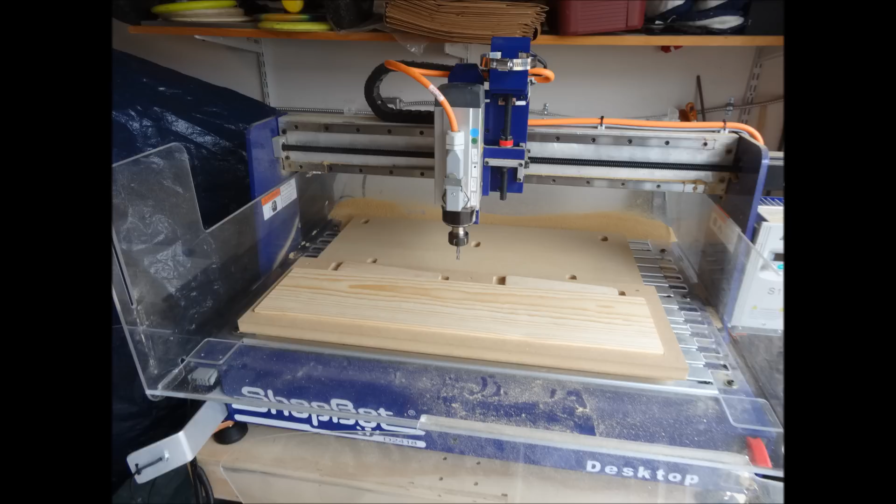Today we're going to do an inlay using a ShopBot desktop and the VCarve software with the inlay feature. We're going to be using Vectric's VCarve Pro or Aspire software for this demonstration.

What we're going to be looking at here in this first example is what would happen if you don't compensate for the tool radius. So we have our normal job set up, and we go over here to create our toolpaths. Cutting an inlay has a male and a female cut. Whether they're through or pocketed, it's still going to be the same two types of cuts.

A problem that people run into is they use the pocket and profile toolpaths up here, and that does lead into some problems. So I've created a profile and a pocket toolpath, but doing that with an inlay, you're going to come into some issues that won't allow these to mate.

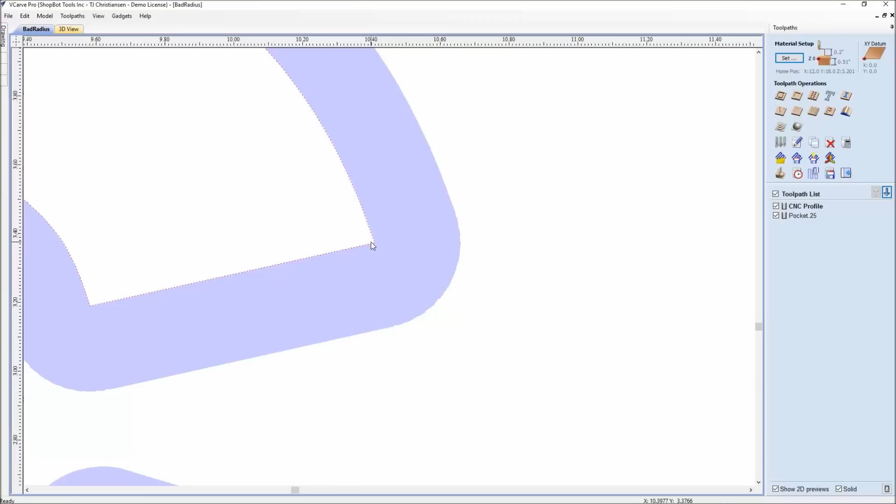So first of all, with a typical profile toolpath, it is selected in this example to cut on the outside, and that would leave a square corner. This purple demo can be turned on and off right here to make your toolpaths solid. And as we see, this is a solid purple, a straight corner inside the purple.

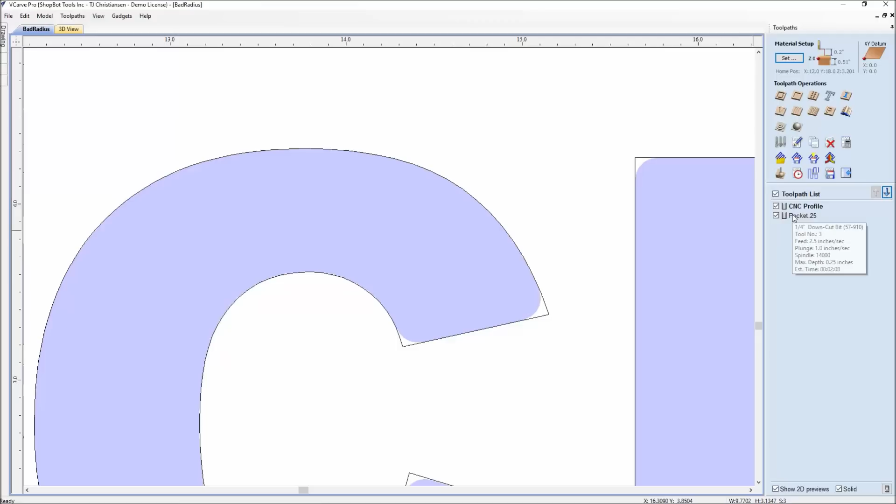If we look over here, because it is a 1/4 inch cutter that we're using, even though it is a 1/4 inch down cut on both tools, you can't cut a square corner with a round bit. So that's where Vectric has added this feature here called the inlay toolpath. That's going to allow the software to do the moving of the corners and mating the male and the female, or the pocket and the insert.

But let's show you what this would look like out on the machine. We can see it here in 2D that it's not going to be able to get the bit all the way down into the corner of the N, where the pocket will be perfect. We have our rounded corners on our C's, and we have our square corners. So let's look at what would happen out on the ShopBot itself.

So here we are on our ShopBot desktop. We have a 1/4 inch down cut in, and we're just using a jig here because it's easy to switch out the blanks for this example, but any other format would have worked for a hold down. And here it is cutting the C. We're in a piece of pine.

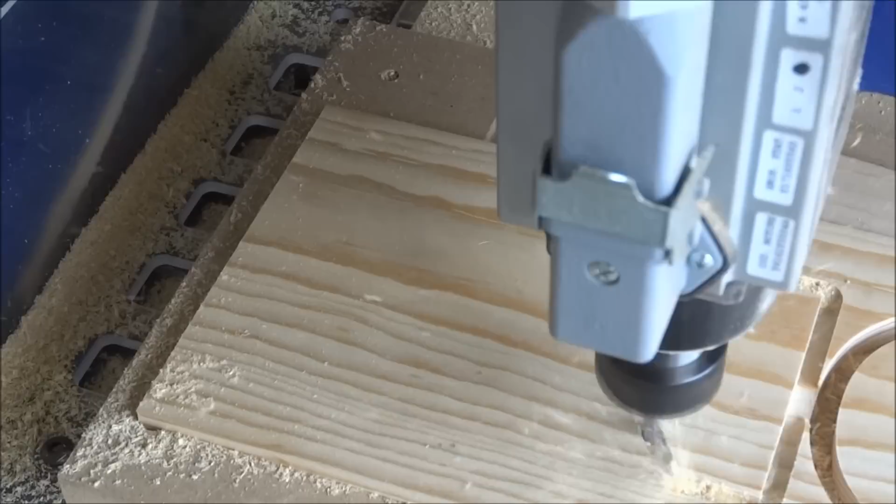And again, this is showing you what would happen if you use just the pocket and profile toolpath, where it does not compensate for tool radius. So we have our exterior square corners on our pockets. And also notice how close these parts are to each other. We are not leaving much of a space in between. And then when we get down to make that final cut, even with tabs, you have the leftover pieces in between the C.

So here we are now doing the pocket, same bit, same tool radius, and it's moving back and forth and carving this out. But like we just saw in the Vectric 2D preview, we're going to have square corners and round corners. So even though it's the same radius of the bit, the parts aren't going to be able to mate together.

We can see right here from looking at the profile versus the pocket. You can also see the scrap here. Look how close these parts are. That's something that could come loose. Notice how the C moved a little bit. Though I broke the tabs out, the inside of that C came with it.

So doing it this way is not going to allow the parts to mate together. One, the tolerance is so tight on the cut, and two, you have a square corner and a round corner. By looking here, you can see it's just not going to physically fit in. So this last example showed a few problems that happen when we don't compensate for the tool radius.

So let's look at how we would go about doing this correctly. First of all, I'm going to do this out of two different species of wood, so it'll look nice.

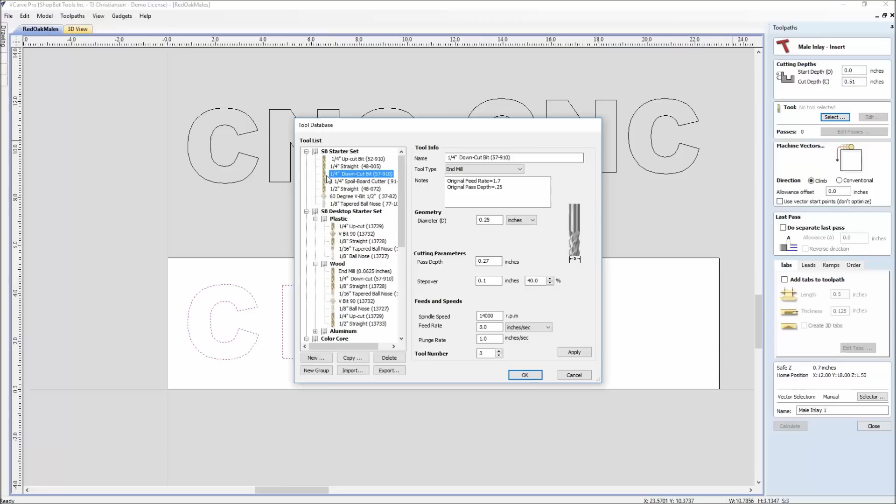So there's my Z thickness of 0.5. I like to go a little bit deeper into the spoil board to make sure I get a nice through cut. This is the key to using the inlay toolpath function: the auto inlay will only work if you select the same size diameter for both the male and the female. So I'm going to use a 1/4 inch down cut just so I don't blow out any grain on this one. I'm going to leave it as a climb cut.

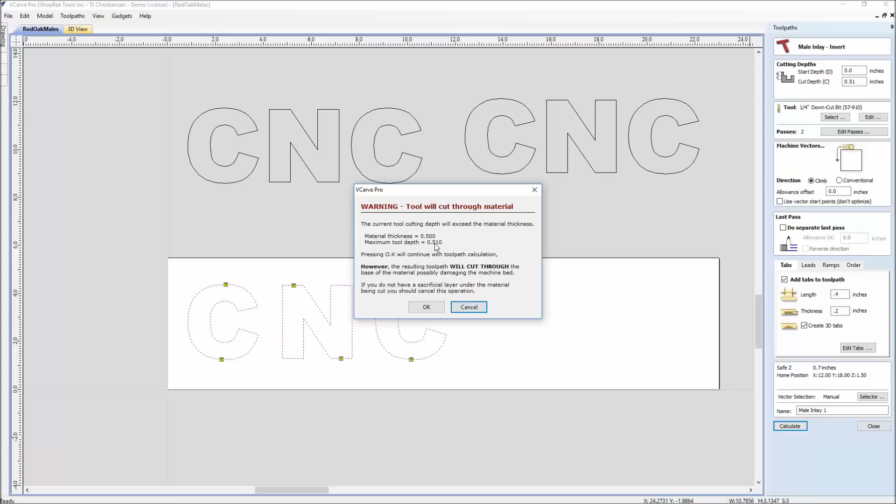Since these are going to become free-flowing letters, I'd like to add tabs to those. And we're going to give it a decent tab so that it's not going to have a chance of coming loose. And these as 3D tabs. And this one even has a name for it, male inlay 1, so we know that it's the male cut. And when we hit calculate, it's going to first say, hey, your material is 0.5, but you did say 0.51. Are you okay with that? So check both the decimal and the numbers. You don't want to see a 5.1 in there.

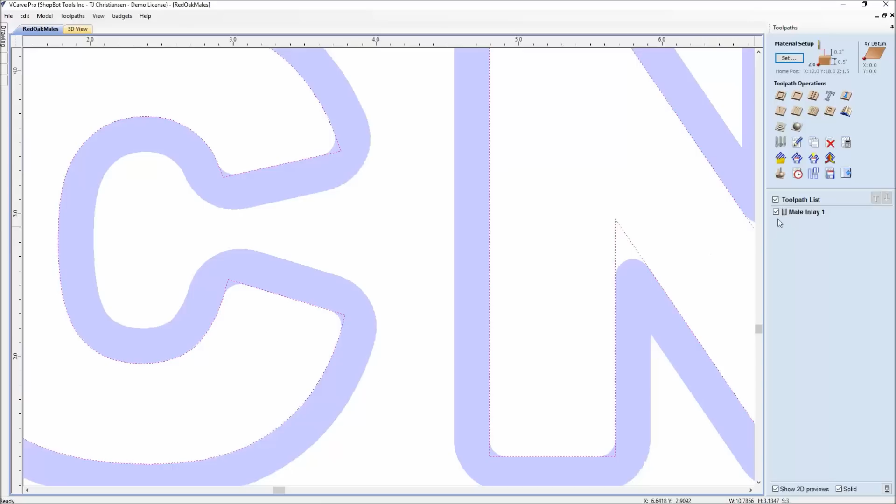And hit OK. And then here we are in preview, where we can preview the visible toolpaths. Obviously in the 3D, we now see rounded corners, even though our font had a straight corner. And then back here in the 2D view, I can turn on the solid, turn on the toolpath. And using this inlay toolpath function, it was able to break that corner with the 1/4 inch radius bit. So it also broke the sharp corners, and it knows how far it can get into these corners on the inside. So this is where we will go next out on the ShopBot and cut the male portion of this.

So here is the first piece that we're cutting out of red oak, and this is where the jig comes in handy, because you're using several different species of wood, and it's just easy on and off with the material versus running the screws in the corner and lining it back up. So that's just an option that you can have. Notice there's the tabs that go in there to keep the C from coming loose.

But now, as we saw in the toolpath of the Vectric software, using the inlay toolpath function, it went ahead and broke those sharp corners up, and it knows to compensate the tool radius for a 1/4 inch bit. So as long as you're choosing the 1/4 inch bit for both the male and the female portion, the software is going to put the right size radius around the inside and outside of your letters or whatever it is that you're inlaying. So breaking the tabs out, you might have to sand up the tabs a little bit. If you want to stay away from tabs, you could look at different types of hold down to keep that in there for a really precise inlay.

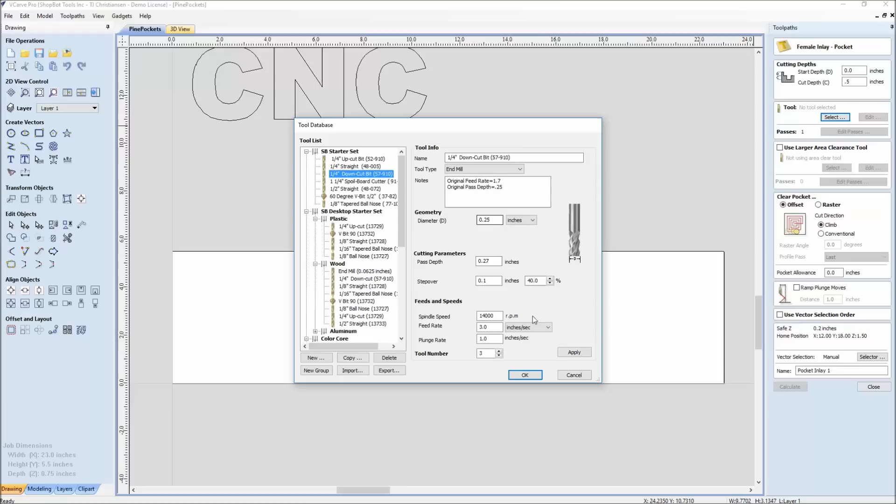So the key to this one, 1/4 inch down cut. That's what I used in the last one, a 1/4 inch. Make sure you have the same diameter. Select this, and depending on the wood and the materials, you'll come in and pick your type of cut. And this one here, I'm going to go ahead and hit calculate.

Again, it does go into preview with the 3D. Preview what it looks like. You can switch back to 2D. You can see what you're doing with the solid view by turning on the solid preview. So a couple things that we're going to look for here: we see that there's the other part of our pocket that's going to stay to match the male.

But something that you can set in either profile, pocket, or inlay, male or female, and that's what we're going to look at here, is the pocket allowance. So right now we have a 0.0 allowance, and when we hit calculate for this, it's just cutting the female version that would be mating with the male.

And this is just a trick that I like to do. We cut out the red oak one first that had the individual pieces. Now those are sanded, those are off the machine, and they're free pieces. I like to go next and cut the female portion, the pocket. And then when that's cut, it's still attached to the table.

I can take the previous cut of these red oak individual CNC pieces and try to fit them into the newly cut pockets. And if they don't fit, that's where you can go back in here and add what you would call a pocket allowance. I just found personally that it's easier to do it on the pocket or female inlay, because you have these physical male parts already out that you can fit in.

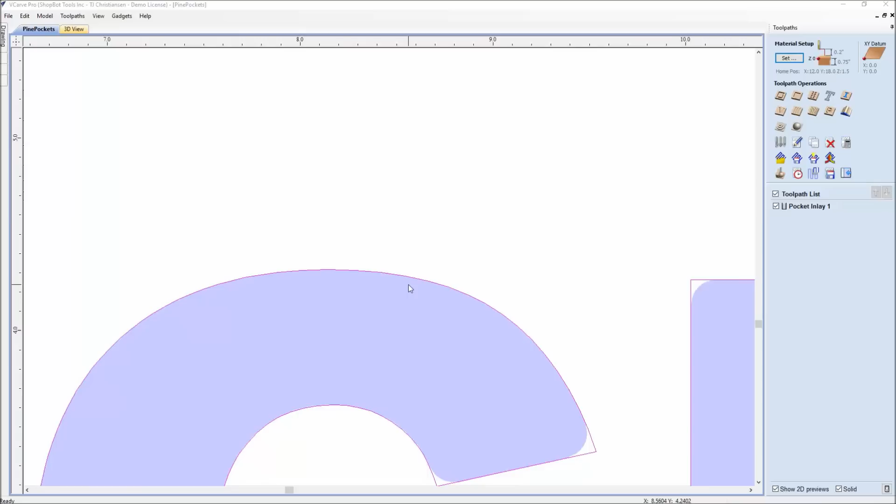The pocket cuts right to the edge of the vector, and the profile from earlier cut to the outside of the vector. So it's not going to fit. The machine has that tight of a tolerance when it cuts. You also need to consider where you're at in the world, the moisture content of your material, the humidity in the air, the type of material you're working with. So when you go in to add your pocket allowance, it's not always going to be the same. So practice with scrap material and know what you're working with before you get into the larger mass production product run.

A lot of times here with thinner veneers and inlays, you can get away with a small pocket allowance of 0.005. This one here being a really deep inlay, that was the material we had on hand, I'm going to go ahead and make this a little bit larger of a pocket allowance. And again, I'm cutting the female portion out larger. The male portion, I'll take like a puzzle piece and try to fit it in there. If it doesn't fit, I can come back and change this to make it bigger.

Versus the physical male part that's already been cut out, how do you rehold that down now that you've already snipped the tabs off? So it's easier doing it this way. Again, any way that you want to do it, you can. But we're going to give this a pocket allowance of 0.01, meaning it's going to go out larger to the left side and to the right side of the vector. So it's actually going to be cutting out in real size 0.02, 20 thousandths out. That's just because I have a really deep cut for this one, to get it to fit down in there. A lot of times you'll have a lot tighter tolerance for this.

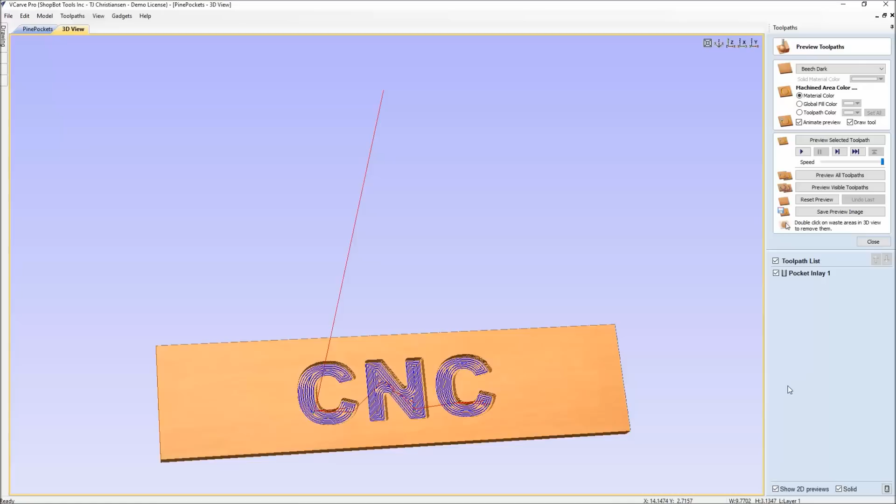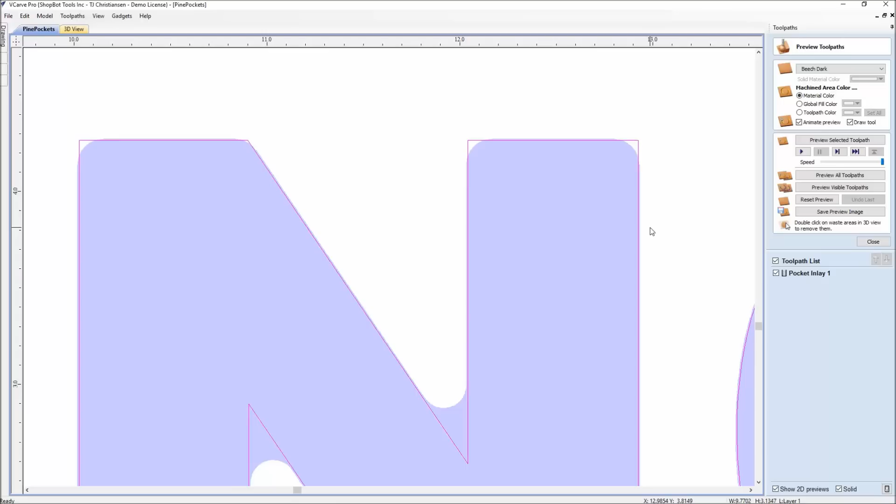So go ahead and hit calculate. You can't really see the difference in the 3D preview. So again, switch back to 2D, make your toolpath turned on, and turn on solid down here. And when you scroll in, you'll notice that this has expanded, and you're now having allowance outside of the vector on both sides. That 0.01 and that 0.01 in this example are going to give an actual pocket that's larger by 0.02. So then go ahead and resave this, and we'll run it out on the machine.

So for this example, it's going to now come back and cut out the tolerance offset that we just put in. Normally we would build this in the first place, so it would have done this all in one cut, but this is just to show you the demonstration of not having a tolerance versus having a tolerance. So now it goes around the edge, makes it larger, and then the CNC male parts will fit better down inside there. So again, the pocket parts are cut a little bit larger, depending on the material you're working with and the size of the tolerance you're going to use. This was a very deep pocket, so I used a little bit larger than I normally would.

First I'd want to put glue in there before I hammer it down all the way into place. Since the pocket was cut the same depth as the thickness of the CNC red oak layers, I'm just going to glue it in there. Once the glue sets up, sand it, get a nice flush surface between the two different types of wood. Make sure you clean it off, blow it off, clean your wood, raise the grain, get it ready, and then apply your finish of choice to it.

And this is just an example of one form of inlay, where it's just using the Vectric's inlay feature. So that's a simple one, and this is where I recommend you get started. And then there's several other options that you can look at for doing different types of inlays with your CNC ShopBot using MDF. And this one is going to have raised letters.

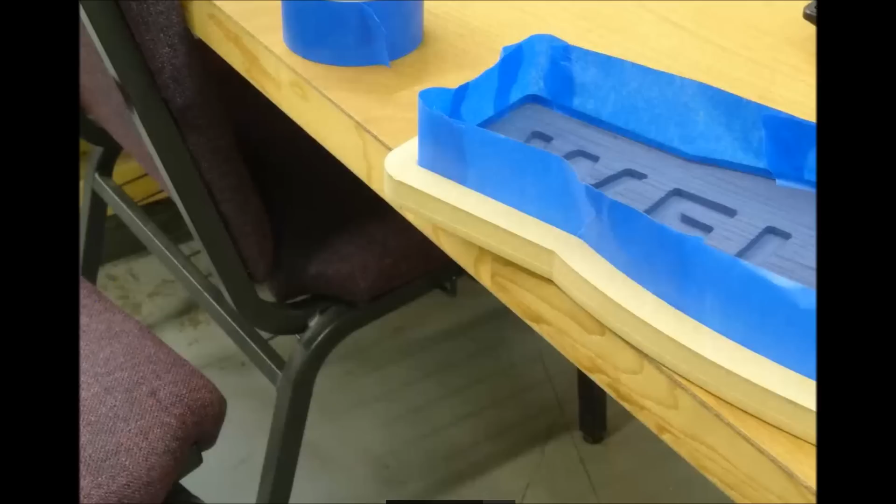And this will now allow me to put an edge around there. And now we've got two-tone, and the letters have been painted separate, and now those can just be used with some glue and pushed into place. You have a raised letter sign using the inlay method that we just were demonstrating.

And then I just want to finish this one up by showing you the welcome sign in the Vectric file. So you can see here's just some earlier versions of getting the size. There's what the finished sign looks like. Since this was out of one piece of MDF, you could see where we used everything we learned in the CNC example. For the male parts up here, the letters were spaced further apart, so we'd have room to cut around them.

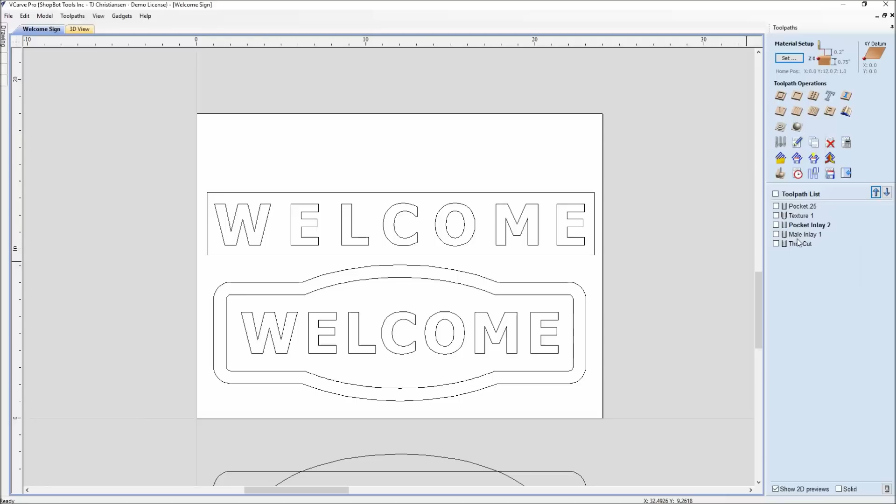Over here on the pocket, this one was first of all a 0.25 pocket to get down to where the texture would be, and that's for our textured surface. Then we get into our pocket inlay. You can see that went another 1/4 inch deep down from there.

And notice the pocket allowance on this is negative 0.005, a lot tighter tolerance because I'm only pushing these letters in there just a little way, so I didn't need to have it. And I wanted to have enough tolerance that if I added a little paint to them, it would still fit down in there nice and tight. So you're going to have nice tight pocket allowances when it comes to shallow inlays.

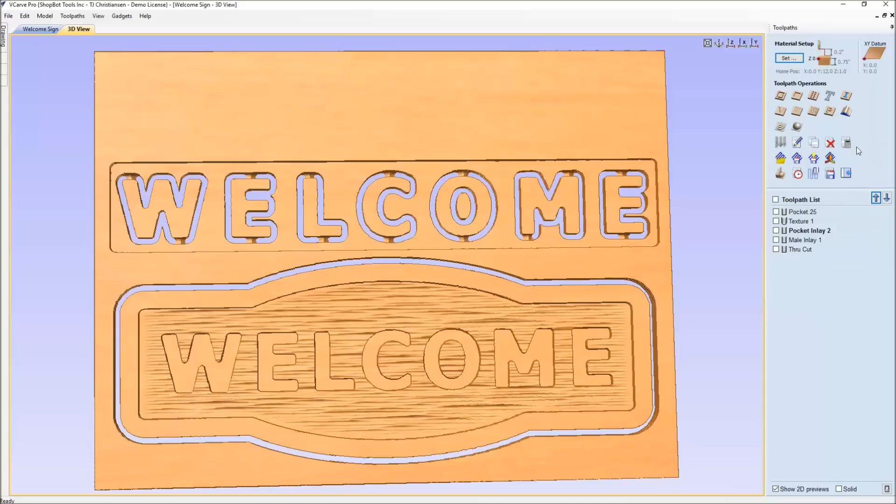And then finally, what we just saw out on the machine would be represented right here, and that would be what we just had looked at with the video. So this was using the pocket, this is using the Inlay toolpath with the Vectric software out on your ShopBot.

To point out a couple other methods of inlays, definitely check out the Vectric's website where they do one with a V-carve inlay. And this one's really nice because it allows you to have crisp corners instead of the typical inlay feature where it has to have a radius corner. This one allows you using V-carve to get nice straight corners. So this is a really nice one to do. Enjoy the results from this.

Another one that I'm a big fan of for doing inlays, and this is with veneers, thin veneers, is the Donek tools. He has a Donek drag knife, and there's several different models of this knife for different thicknesses of materials. So if you're going to get into doing a lot of veneer inlays, definitely worth a while to check this website out and see the product because it works great for that.

So as you can see, there are several different methods for inlaying. I'd start out by messing with the inlay feature in VCarve Pro or Aspire, and then start knowing your materials and the tolerances of what they could be, and then start looking into some of these other ones. The VCarve inlay feature is really nice and is able to get the nice corners, angled corners that you want.